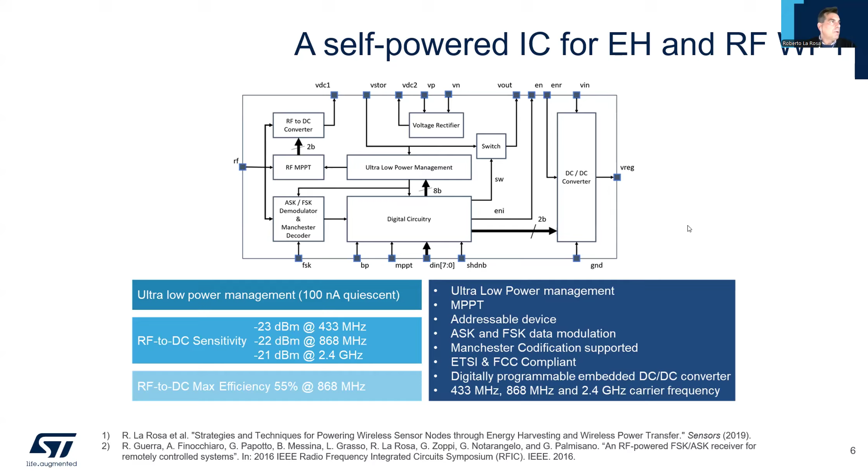Doctor, are you on slide number 6? I think you may be moving the slides, but we couldn't follow you. Are you talking about the same slide, number 6, or are you moving your presentation? Because we're still stuck on the same slide. It's number 6, I'm sorry. I'm sorry about that. I was talking about this. Okay, please, I'm sorry. I was talking about this. Now I was discussing this circuitry here. Okay, it's fine, yes, it was not updating. Okay. I'm terribly sorry about that.

So good to know. Basically the idea was, as I told you, at time zero: this is the state-of-the-art solution where you have the battery always charging the wireless sensor node, and you have a steady standby current, which is basically like paying somebody who is doing nothing. We are giving current to a wireless sensor node that is sleeping, not doing anything. So what we want to do is put a switch in between, so that the system is normally off. The switch is open, and we don't have any current going from the battery into the wireless sensor node.

So when we need the node to work, we can send the radio frequency power. This power will be received by a receiver that converts RF to DC, and closes the switch. Only at that point do we have current going to the wireless sensor node. So there's no longer a standby state, it's either on or off. And when I need to turn it on, even with a remote control, I can send it.

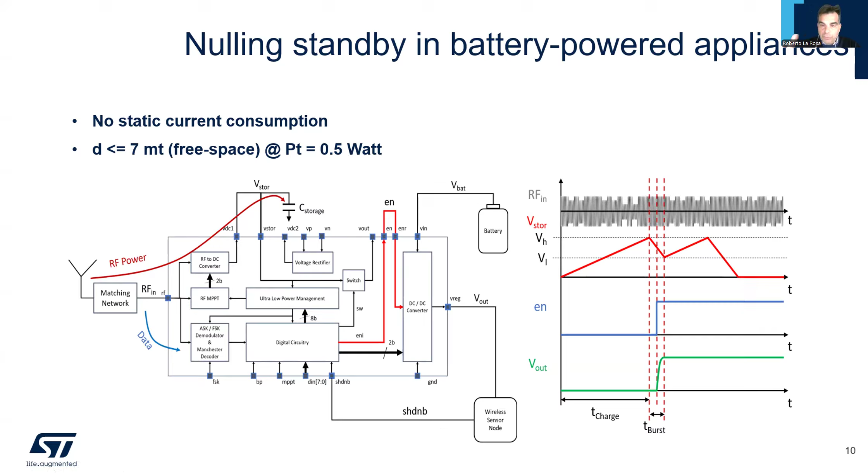That's the main difference. The idea is that nulling standby power consumption basically doubles the battery life of the wireless sensor node. But sooner or later the battery will need to be replaced. Instead of replacing the battery every 3 years, now I can replace it every 6 years. It's a big gain, but after 6 years I still need to go there and replace the battery.

What we do here is use a power transmitter, basically just a transmitter as big as this device. Here I have my wireless sensor node that I don't want to climb a staircase to reach and recharge. So what we can do is leave this power transmitter sending power, even for 1 or 2 days, whatever it needs, to recharge the battery.

As you can see, it's the same circuitry, but this time it's storing the energy and diverting it into the battery. So if I stay there, I will charge the battery. This is important because from the energy point of view it's a disaster—we send half a watt and receive only 5 microwatts here, needing to recharge a battery over a long time.

But I don't need to send anybody, especially with a staircase, to replace the battery or change anything. This could be handled by a cleaner or whoever is servicing the room. So it's very convenient from the maintenance point of view—a very convenient solution based on wireless battery charging or wireless power transfer.

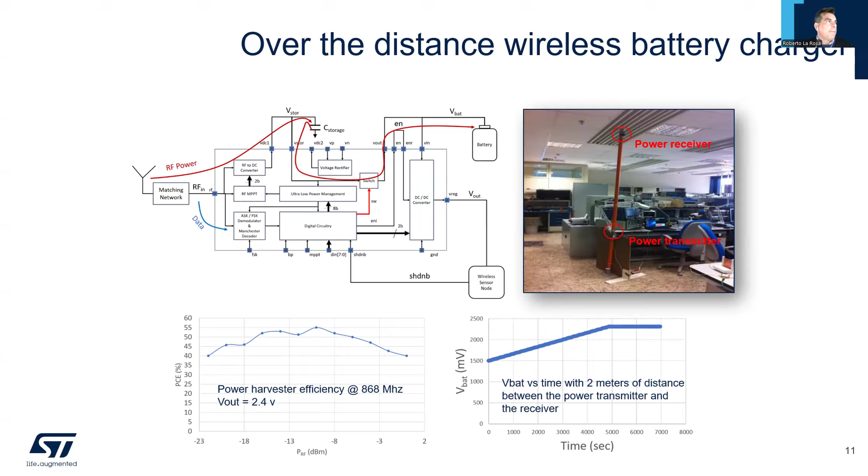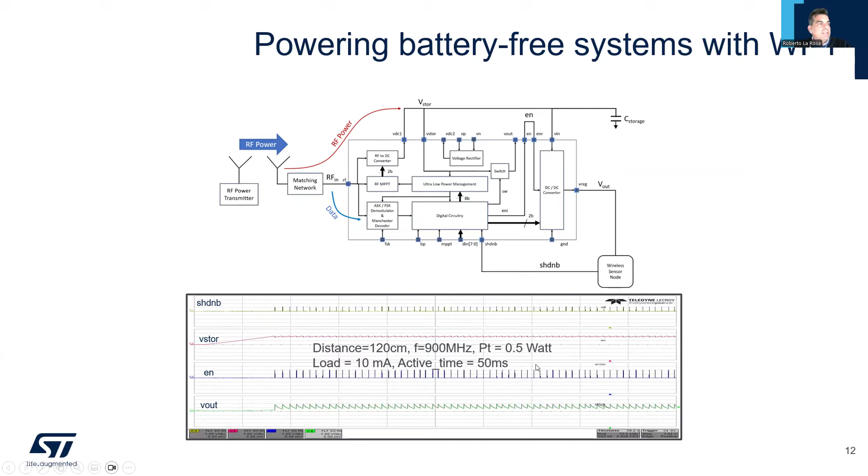We have seen that with a distance of 1.2 meters between the RF transmitter and the node, with a power transmitter of half a watt and a load of 10 milliamperes—which is quite a big load—for an active time of 50 milliseconds, the system works very well. So we can do that.

Now I'll show you a very practical example of this solution. We implemented this circuitry into a temperature sensor to put in an oven. The motivation is that modern ovens can work very well.

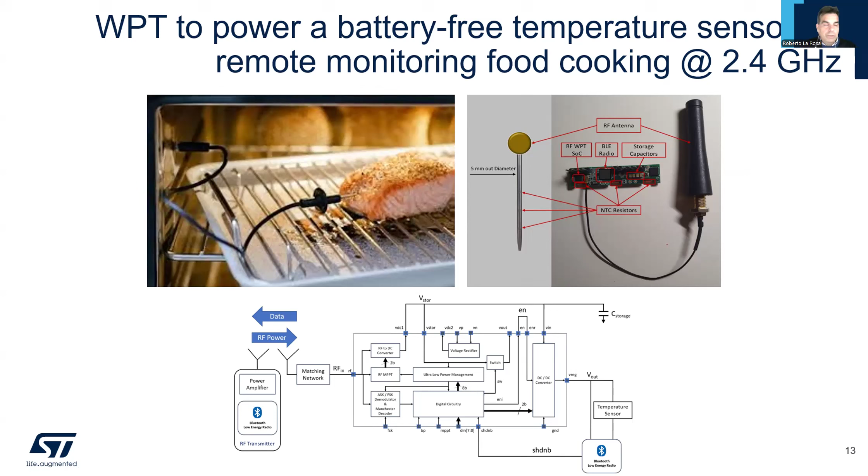Now another application where we have used the same concept is tracking luggage in a conveyor belt. The idea here is that today, when you travel and get an airplane and you have luggage, your luggage is tracked through the barcode.

Everybody knows the barcode on the luggage, which is a very good technology. It's well known and established there for years. But the disadvantage of this technology is that when the luggage gets lost, I need to send somebody with a scanner to scan any luggage one by one until I find the right one.

With this technology instead, that has been sponsored or required by one of the major players in airport management, we put sensors, we put trackers that are battery free on the luggage. So the luggage itself is already tagged with the same

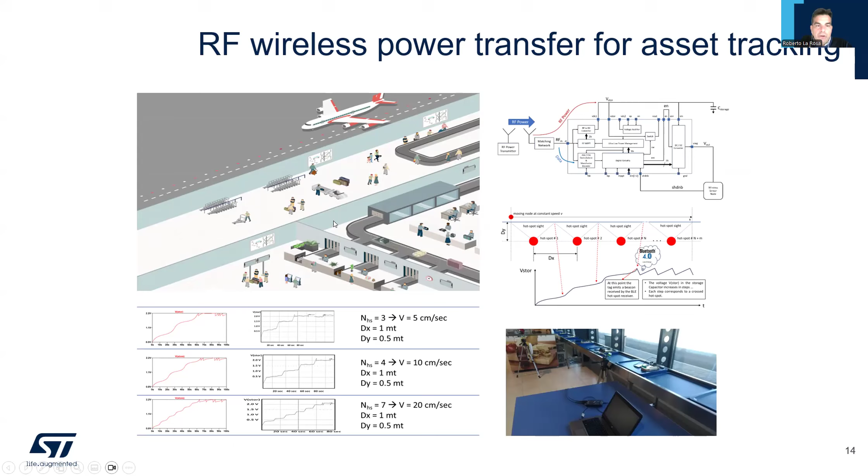Now, we go to the energy harvesting. Yes, like we're over 30 minutes, so maybe if you can conclude, because we have another presentation online. Okay, I just finished my presentation.

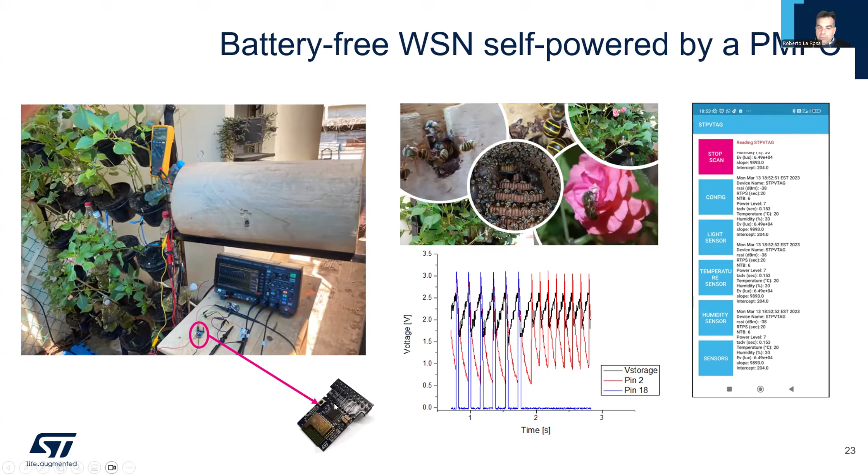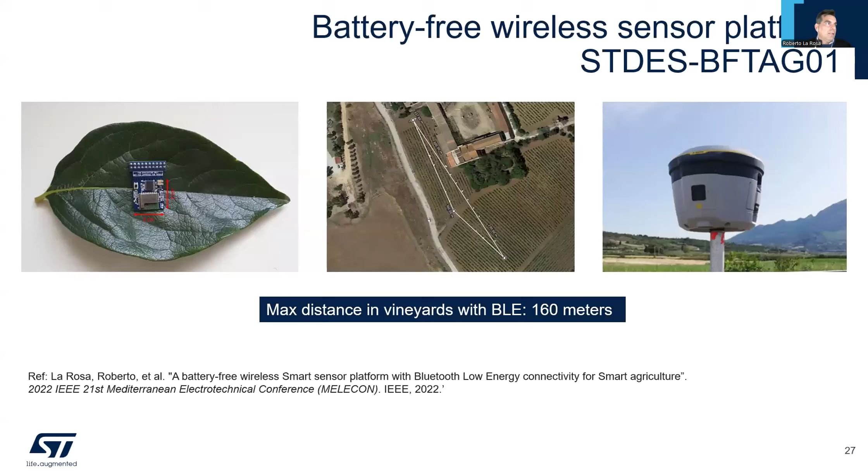But the message here is ready and is industrially proven, so it's no longer research. Having battery-free sensors and getting rid of batteries is no longer a dream. It's something real that can be an entrepreneurial activity. Thank you very much for your attention, and sorry if I had a delay in displaying the slides.

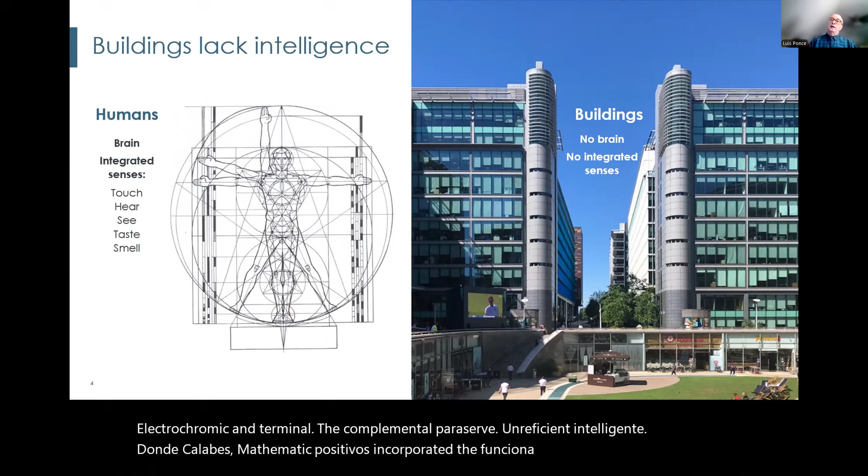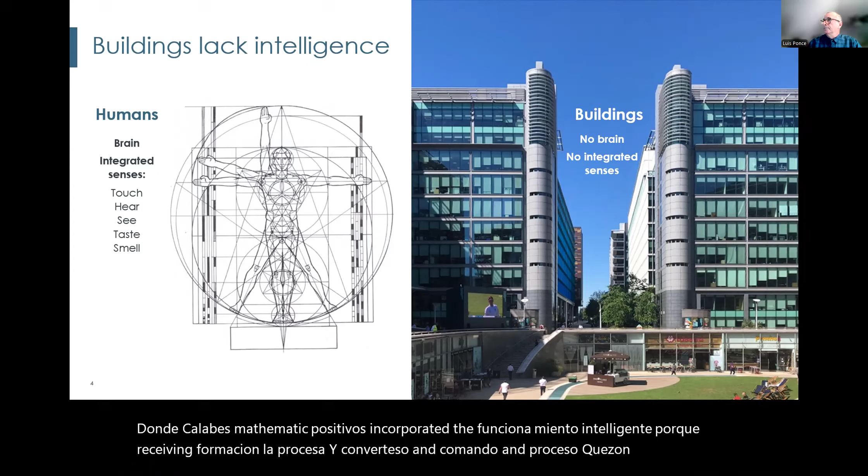Bueno, vamos a comenzar pensando en lo que es el vidrio electrocrómico en términos de un complemento para hacer un edificio inteligente. Vivimos una época de inteligencia, donde cada vez más dispositivos se incorporan a un estilo de funcionamiento que denominamos inteligente porque recibe información, la procesa y convierte eso en comandos, en órdenes, en procesos dirigidos de una manera determinada. En el caso de los edificios, de las viviendas, es algo que se había quedado un poco atrás porque no había sido completa la forma en que esa inteligencia se iba introduciendo en su funcionamiento. Inteligencia que básicamente consiste en dotarlo de sensores y de optimizar su funcionamiento.

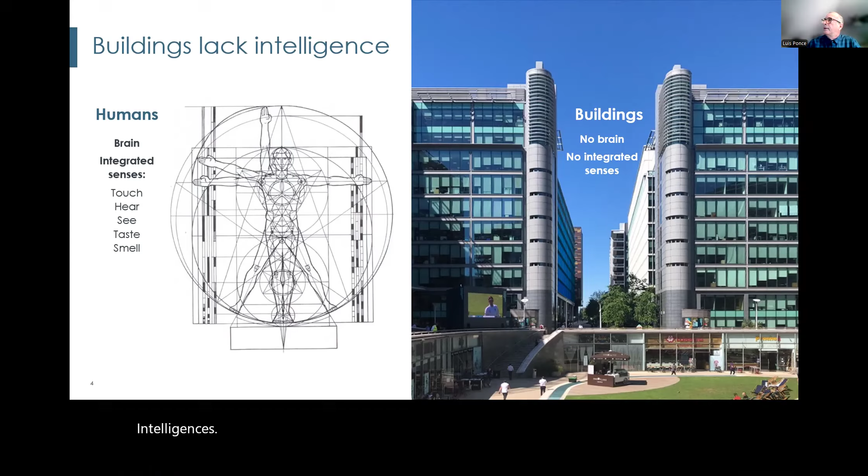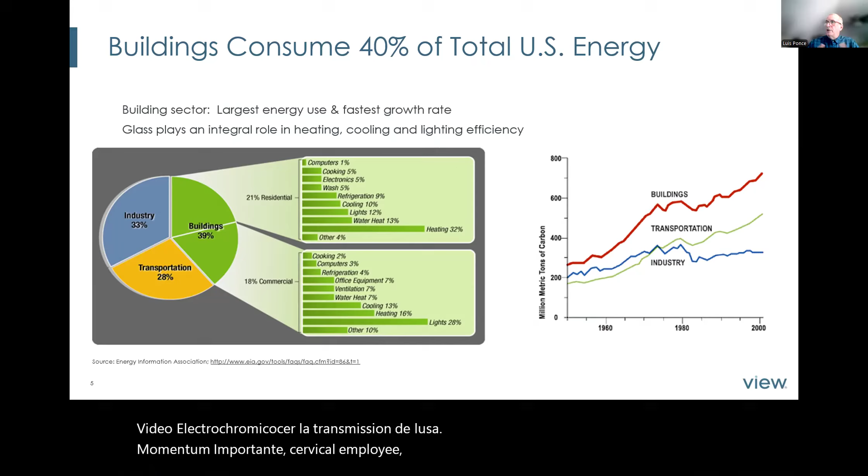El foco del vidrio electrocrómico va a ser la transmisión de luz al interior del edificio. Ese es un momento muy importante, por ejemplo en Estados Unidos el consumo de los edificios en términos de consumo eléctrico es muy fuerte, prácticamente el mayor consumidor que existe de electricidad, por encima del transporte, de la industria incluso. ¿Pero qué es lo que hace el vidrio electrocrómico?

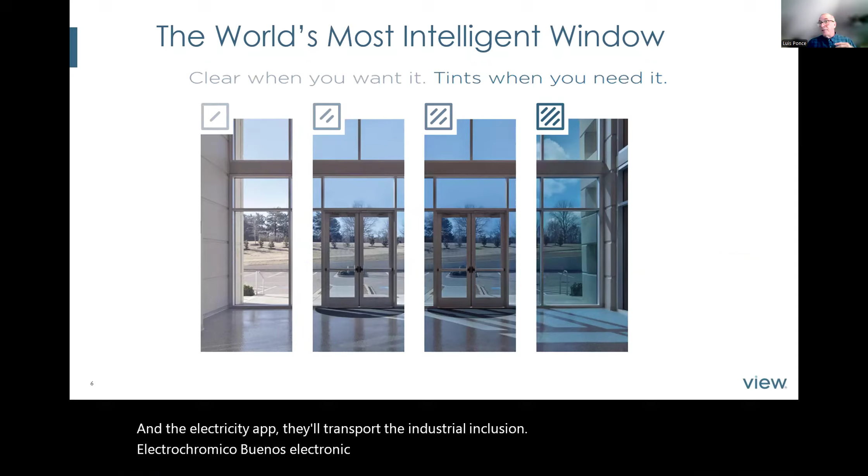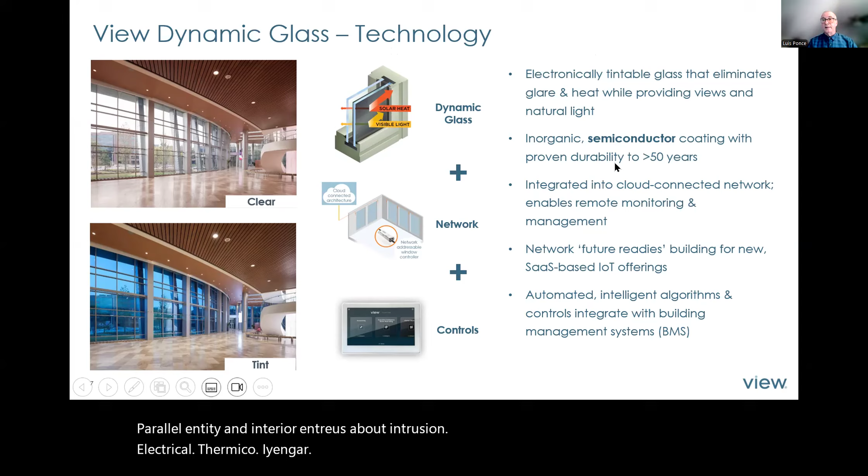Aquí en el centro ustedes pueden ver cómo se hace este dispositivo. Básicamente es una estructura, un device, donde tenemos dos vidrios colocados en paralelo entre sí. En el interior, entre ellos, se va a introducir un gas inerte para favorecer el aislamiento térmico. Y en la pared interna de uno de estos vidrios se va a depositar una capa, o más bien una multicapa, de un material semiconductor, que es la que va a permitir que ese dispositivo funcione. Eso se va a conectar a una red, a un network, y a un sistema de control que va a recibir información de sensores y va a determinar cuál va a ser la transmisión de esa ventana.

Perdón, ¿se me escucha bien? ¿Todo está bien?

Bueno, aquí hay un ejemplo de un edificio de un cliente al cual se le entregaron estas ventanas, y pueden ver dos situaciones a distintas horas del día, cómo va cambiando esa transmisión de luz para optimizarla.

Ahora los voy a invitar a ver brevemente un video de minuto y medio. Van a escuchar al director de nuestra compañía contar un poco cómo funciona esta tecnología, e incluso vamos a hacer una pequeña visita a la fábrica para que se hagan una idea de la tecnología que hay detrás de esto. Van a ver también un par de aplicaciones muy interesantes; no voy a hablar de todas ellas, pero les va a dar una idea de la gama de posibilidades que ofrece esta tecnología. Entonces, vamos a escuchar.

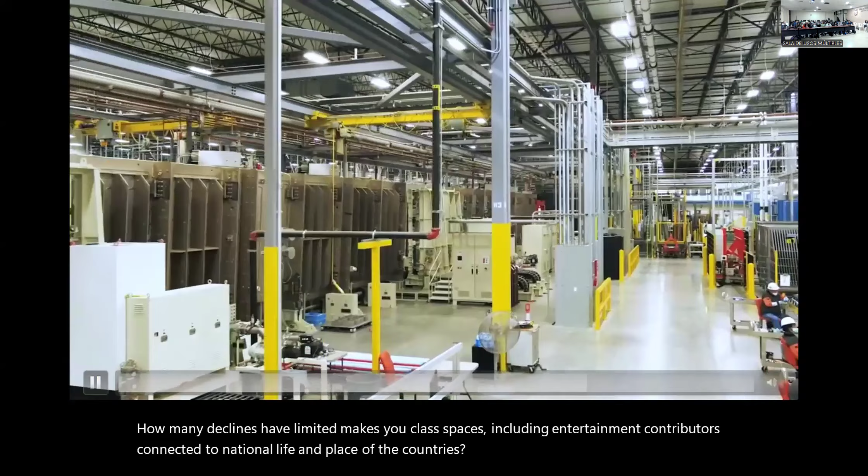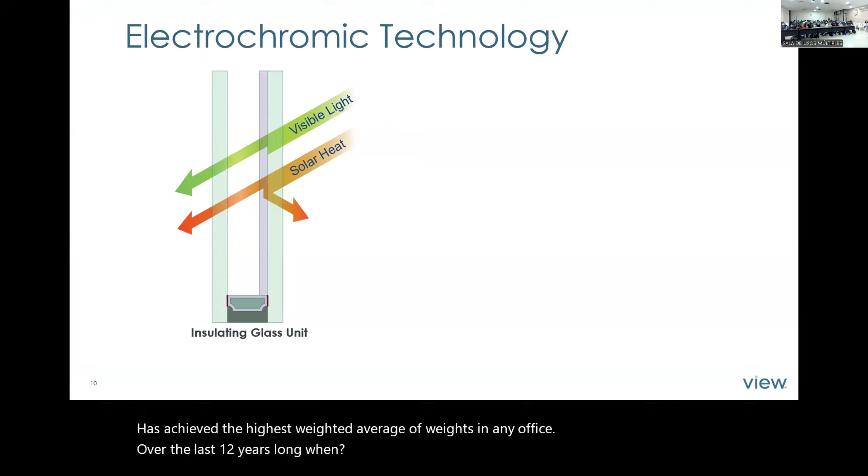Pero no se escucha, doctor. No se escucha el audio. Acá tiene el volumen, pero allá no sé si es algo. Ah, es que no le dio volumen. Es que ahí tiene el volumen. Doctor Luis. Ya va a acabar. Perdón. Bueno, sí se pudo ver. Se pudo, pero no podemos escuchar nada. Qué pena, en fin, lo más importante era la imagen, ¿no?

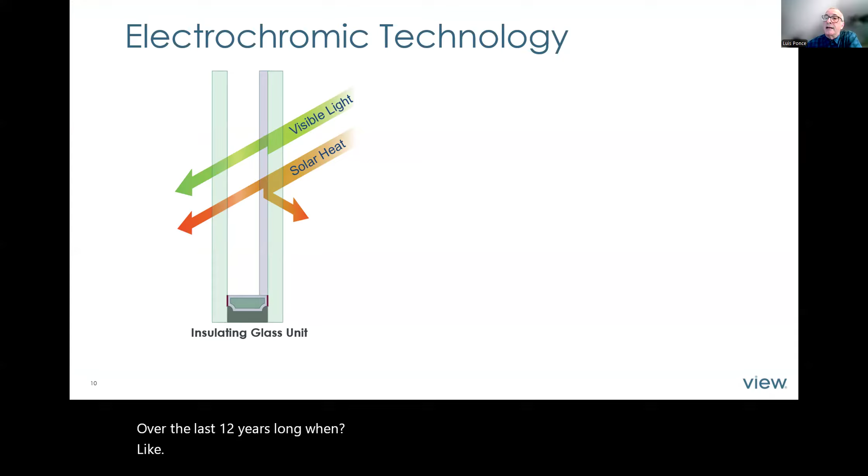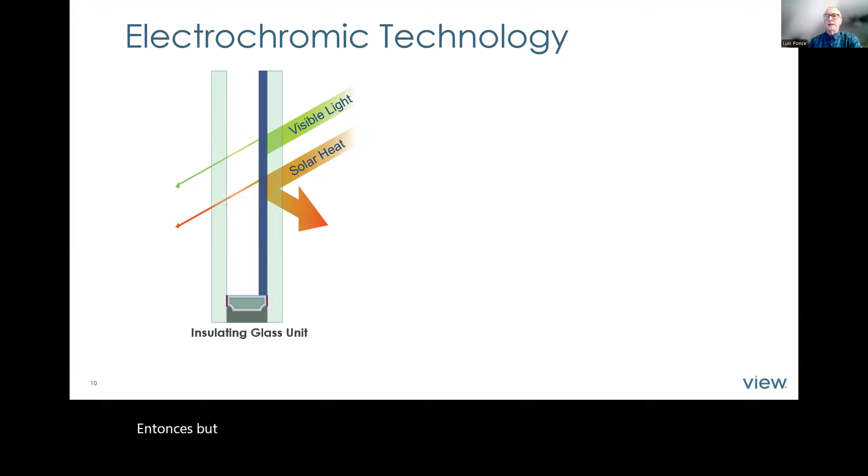Aquí vemos nuevamente un croquis que ilustra cómo está estructurado el dispositivo. Básicamente en esta capa que está en el interior de una de las paredes está la multicapa: vamos a tener un grupo de films que forman la estructura del dispositivo. Ahora vamos a ver cómo eso funciona. Básicamente, una vez que se polariza, ocurre una transferencia de cargas y esta conduce a la variación de las propiedades ópticas de esa película.

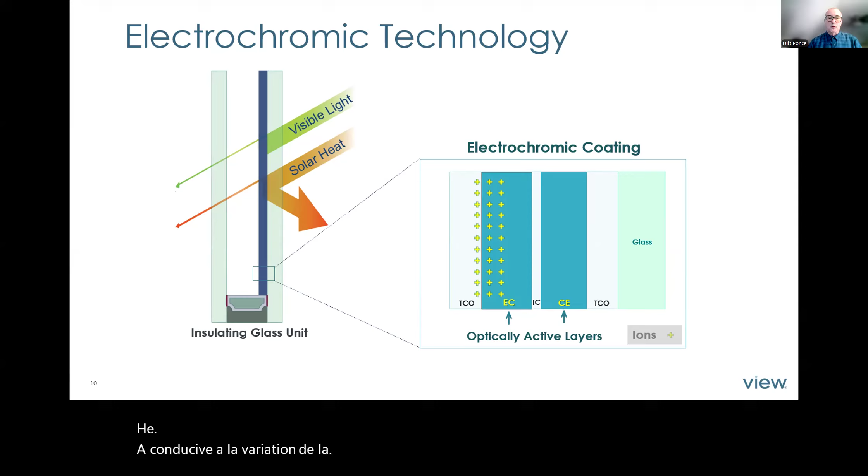Aquí lo podemos ver en un corte transversal. Ese film está formado por un total de 12 capas, aquí no se pueden distinguir todas, con un espesor total de 1.6 micras. Esto que ven aquí abajo es el vidrio, que sería el sustrato. Luego se deposita un conductor transparente, que va a ser uno de los electrodos. A continuación hay dos capas, EC y CE, que son capas semiconductoras, y arriba, al final de todo, otro conductor transparente. Estos, al ser polarizados, generan o inducen el movimiento de cargas que va a transformar las propiedades ópticas del dispositivo.

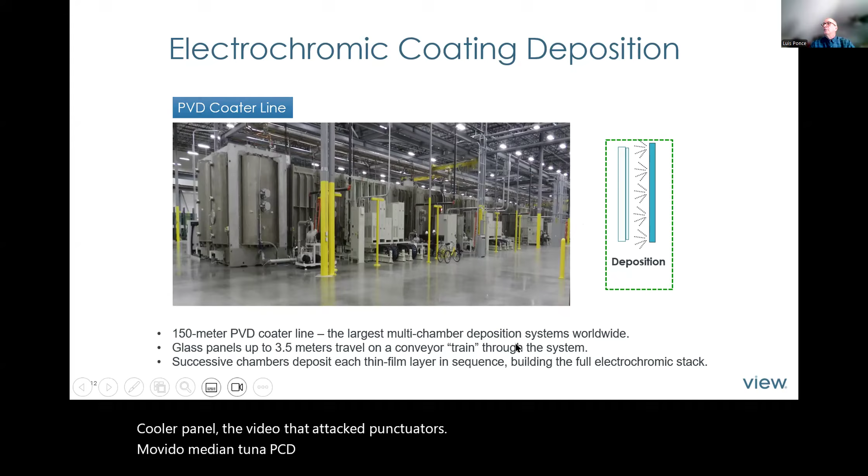Esto que ven aquí es el sistema de ultraalto vacío donde se depositan esas películas. La empresa presume de contar con la línea de ultraalto vacío, según ellos, más larga del mundo. Tiene 150 metros de largo, es una estructura gigantesca, porque por ahí dentro van a circular paneles de vidrio de hasta 3.5 metros, movidos mediante una especie de tren o vagones que circulan por ahí adentro, haciéndolos pasar por las diferentes cámaras.

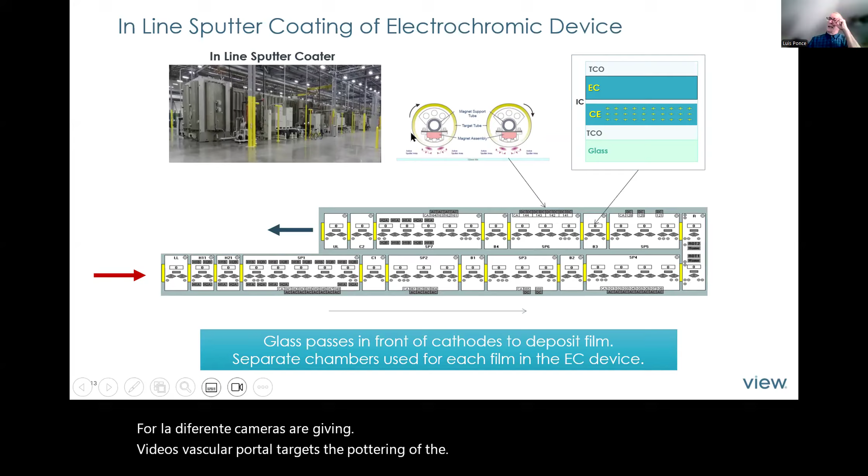Aquí ven, por ejemplo, con la flecha roja se indica la entrada de los vidrios, y va a circular por todo este camino, este recorrido, hasta salir, pasando por los targets de sputtering o del sistema de depósito, que va formando las diversas capas, paso a paso, una tras otra, hasta que sale ya completado. Esa es, digamos, la tecnología más importante que tiene la fábrica, la fundamental, el corazón de ella, pero requiere acompañarse también de otra tecnología muy importante, que es la tecnología láser, que es la que facilita el funcionamiento del dispositivo, como vamos a ver.

Les quiero comentar de pasada que desde que empecé a trabajar en la fábrica me tuve que ver envuelto en un grupo de investigaciones y proyectos, algo muy gratificante, porque uno se hace la idea de que en este tipo de instalaciones todo está ya súper establecido, y pues no, resultó que hay un montón de tarea por hacer. Hay 6 proyectos en los que me he visto envuelto en estos años; les voy a hablar del último de ellos solamente. Pero sí, hay un montón de trabajo para un investigador ahí.

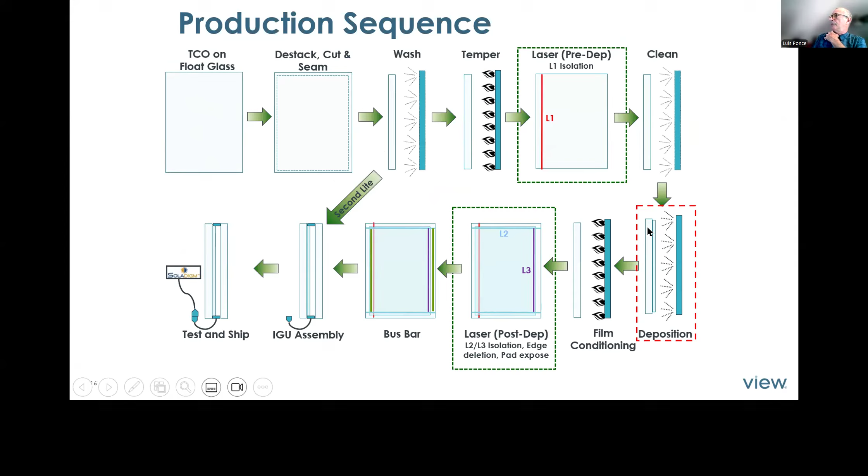Bueno, esto es lo que sucede en el flujo productivo de la fábrica. Llegan los vidrios, se hacen distintos procesos, no voy a entrar en detalle, hasta llegar a este que vemos aquí dentro de estas cajas de líneas punteadas en rojo, que es el proceso de depósito. Y más adelante viene un proceso láser, que ven aquí. Les voy a hablar de él ahora.

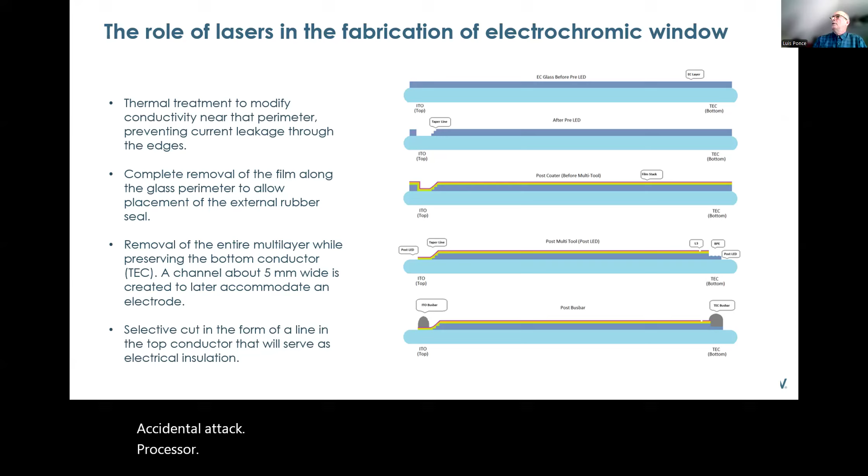Aquí lo vemos, vamos a hacer cortes transversales paso a paso del vidrio. Llega el vidrio con su conductor transparente, y ya hay un primer proceso láser que es de remoción. Como ven, aquí queda interrumpido lo que era una de las capas.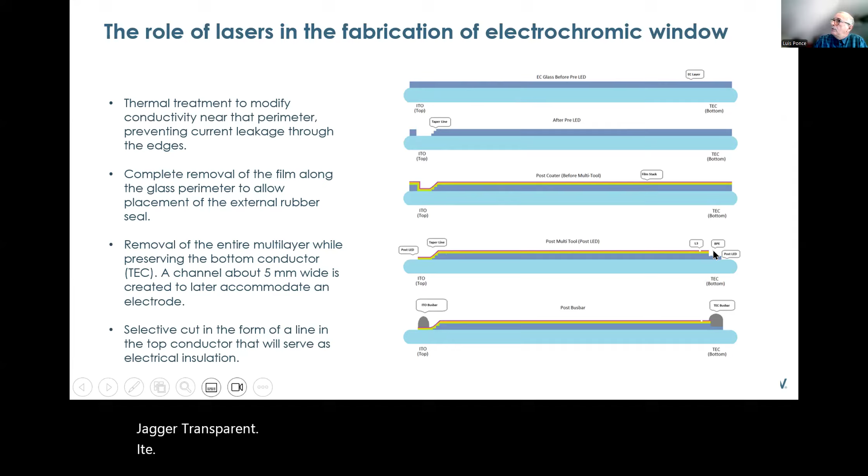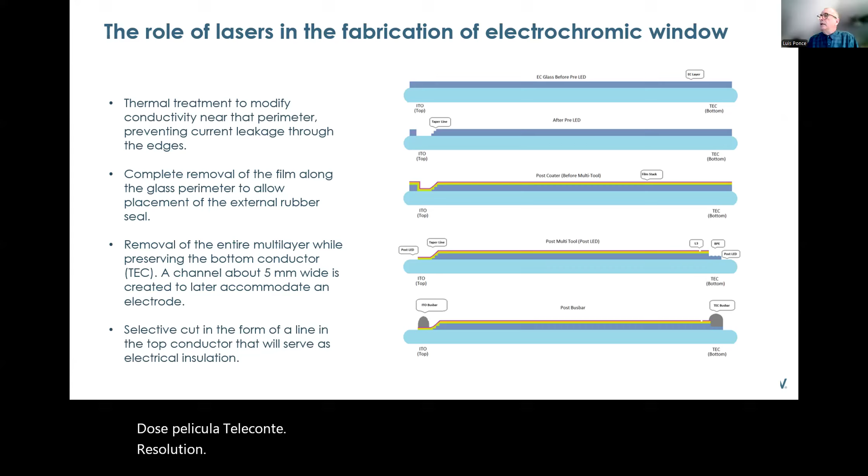Luego se hace el proceso de depósito y hay que hacer otros procesos láser, que se ven aquí donde estoy señalando, a la derecha abajo. Son procesos muy refinados, a veces tienes que con el láser hacer un canal que retire solo una de las 12 películas que les conté. Estamos hablando de resolución submicrométrica en profundidad y en ancho, pues puede ser de canales de decenas de micras hasta algunos milímetros. Muy preciso, es retador.

Son procesos complicados. Este proceso en particular, al que vamos a referirnos más que otros, es un proceso que permite remover una parte de la capa pero preservando el conductor transparente que está hasta abajo, inmediatamente sobre el vidrio. Y miren lo que pasa.

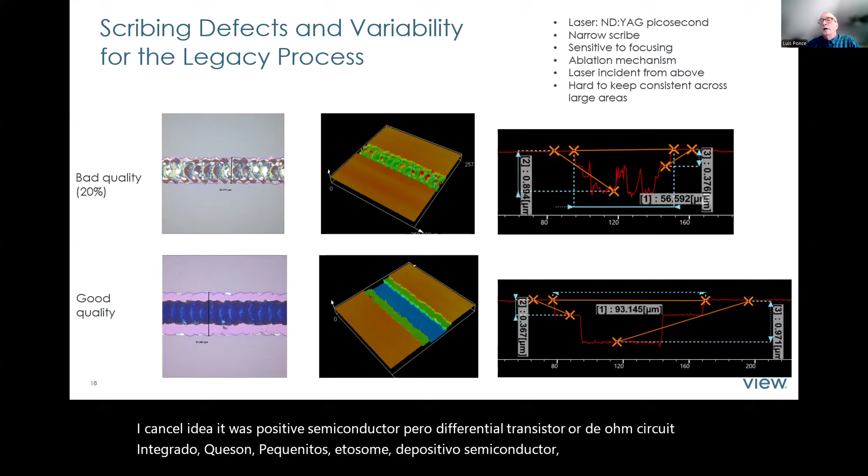Háganse la idea, esto es un dispositivo semiconductor, pero a diferencia de un transistor o de un circuito integrado que son pequeñitos, estos son dispositivos semiconductores gigantescos. Estamos hablando de vidrios de 3 y 4 metros. Entonces eso es un reto en términos de que toda esa capa esté perfectamente uniforme.

Básicamente es casi imposible de lograr. Siempre hay inhomogeneidades, sobre todo en zonas cercanas a los bordes, en diversas áreas. Y eso hace el proceso láser todavía más complicado.

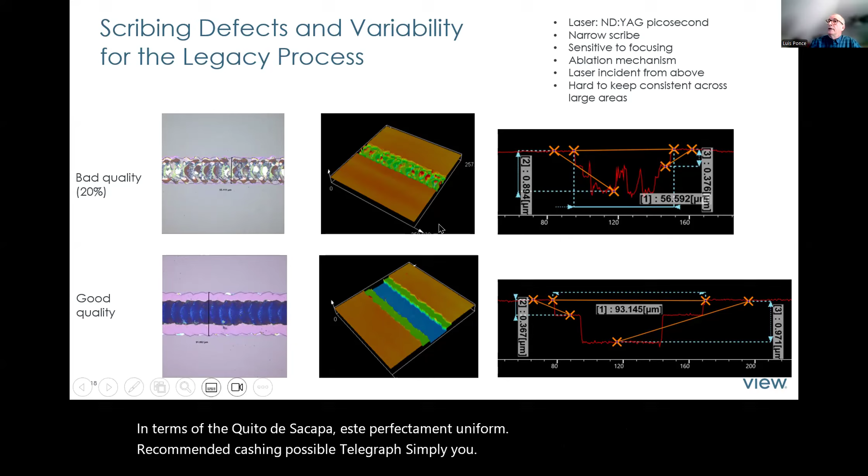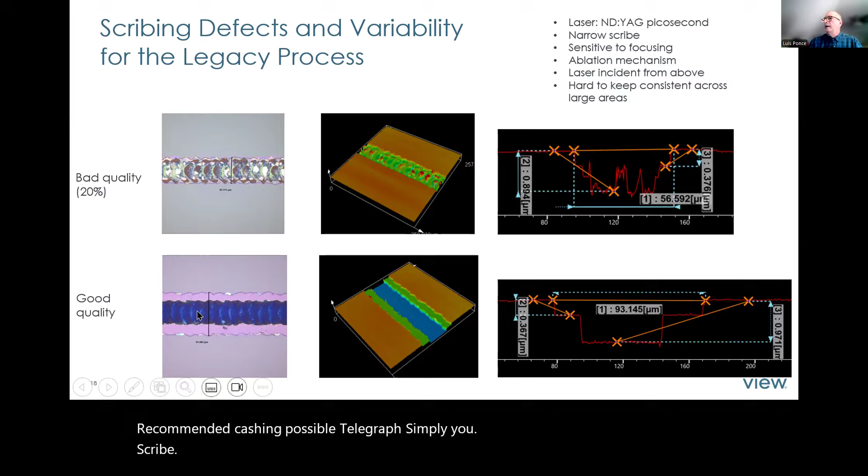Vean aquí dos situaciones. La de abajo es lo que llamamos scribe, es el acto de hacer con el láser un canal. Este quedó muy bien. Vean qué geometría tan limpia, sobre todo en esta figura, es un canal perfectamente abierto. Aquí están las dimensiones: tenemos una profundidad de 0.97 micras, casi una micra, y un ancho de 93 micras.

Pero vean lo que pasa aquí. Debido a variaciones en las propiedades ópticas del material, el láser no trabajó bien, no logró remover limpiamente el material del canal, quedan irregularidades. Todas esas cosas van a afectar el funcionamiento del dispositivo a la larga.

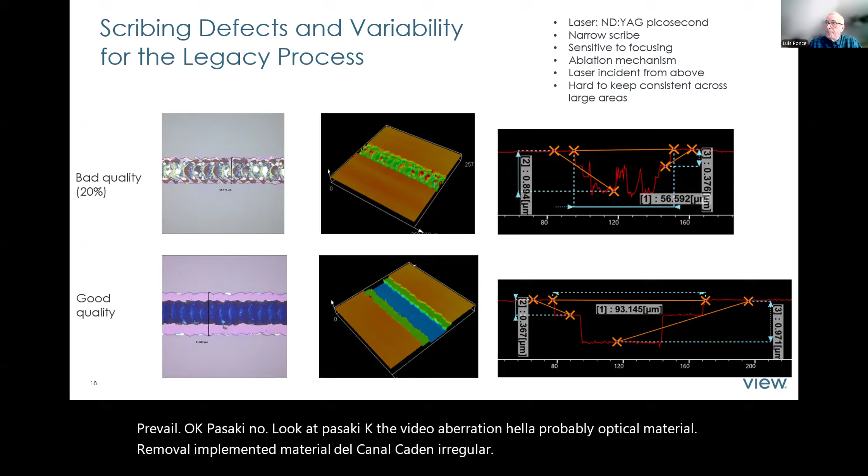Necesitamos un proceso que sea limpio, que sea robusto, que siempre garantice una calidad de esos canales extrema. Y eso es lo que le llamaríamos un proceso selectivo, que retire una parte del material y deje el resto.

Esto llevó, por supuesto, un montón de trabajo, primero tratando de optimizar el proceso que había, que siempre tuvo esa solución, tuvo sus límites, nunca se logró resolver del todo por problemas de principio. Pero para que se hagan una idea, este proceso conducía a pérdidas del orden del 10%, llegaron a ser hace unos 3 años más o menos. Estamos hablando de unos 20 millones de dólares tirados por un proceso específico.

Esto fue así porque se importó un proceso que es el que ahora todavía se usa en la industria de semiconductores, en celdas solares, que allí funciona bien porque son dispositivos de pequeñas dimensiones y el material es extremadamente homogéneo. Pero en nuestra situación eso no existe, es una realidad mucho más compleja.

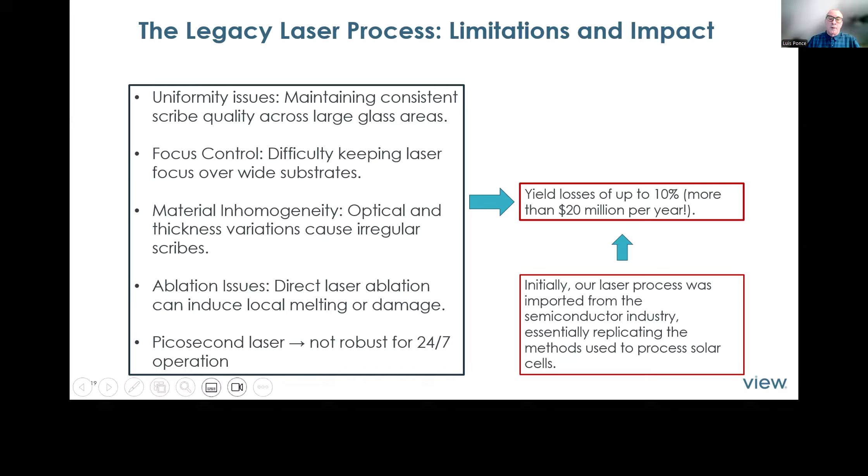Entonces, ¿qué hicimos? Bueno, pues aquí nos fuimos a un paradigma diferente, decidimos eliminar por completo el tipo de proceso que teníamos implementado y que usa la industria, para irnos a otra cosa, le llamamos spallation. Es una palabra un poco difícil de traducir al español, pero háganse la idea de que es como pelar, miren cómo se pela una cebolla. Que tú puedas retirar una película de manera casi mecánica, y que quede perfectamente limpio y sin daño lo que está debajo.

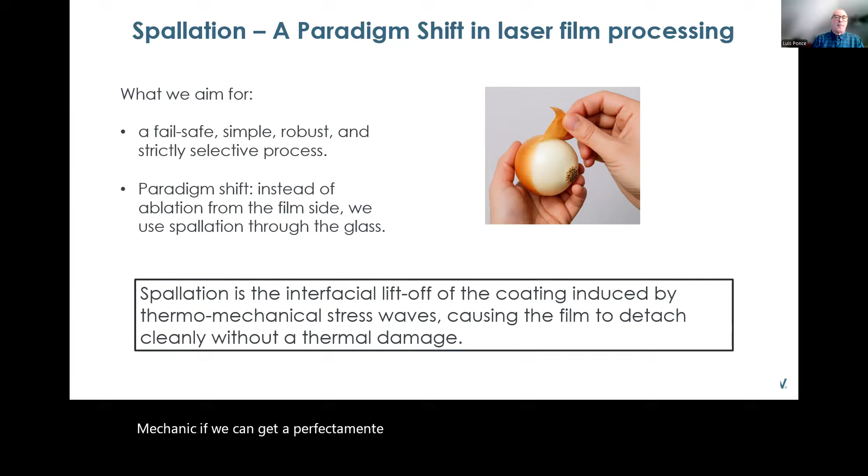Para eso descubrimos una nueva forma de hacer las cosas.

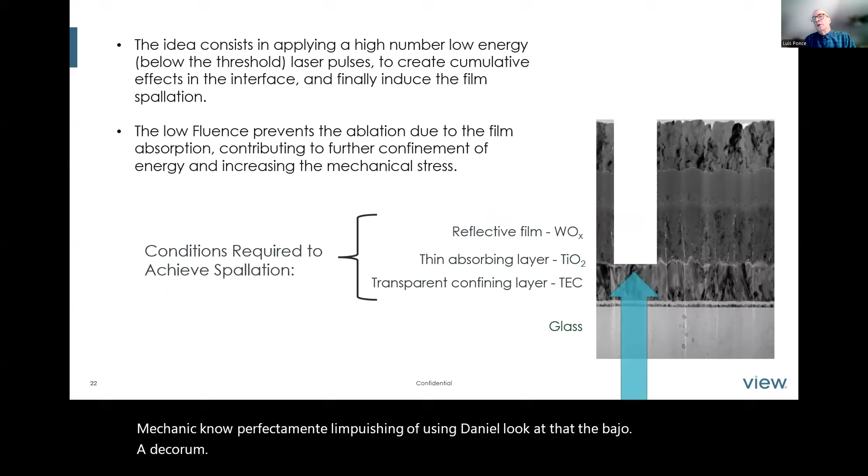Normalmente en los procesos láser llamamos o hablamos del umbral de ablación. Es la energía que tú tienes que darle a la capa para poder extraerla, para poder vaporizar el material. Eso es ablación. Entonces siempre tienes un umbral: por debajo de esa energía no haces nada, por arriba sí extraes, cortas, taladras o evaporas el material.

Entonces lo que nosotros descubrimos es que entrando con el láser desde la parte trasera del vidrio, a través de la capa, eso se podía hacer. Había una variante de esto ya conocida, que es por encima del umbral. Por encima del umbral tirabas a través de un material transparente y ¡pum! Lograbas retirar el material deseado.

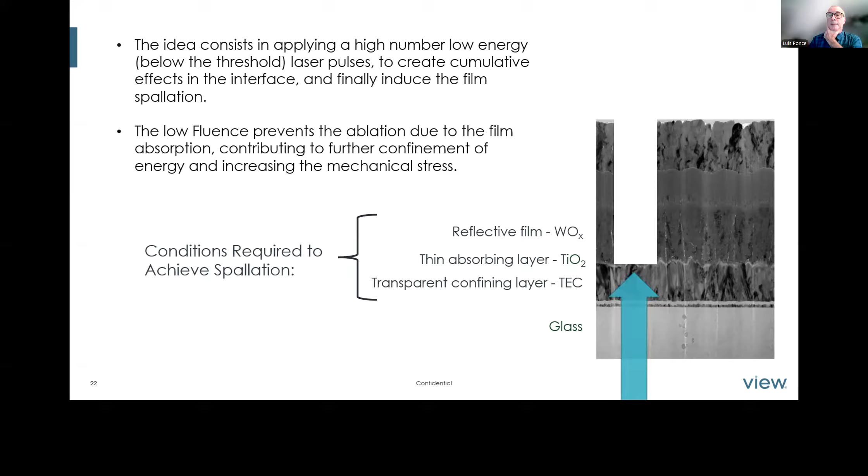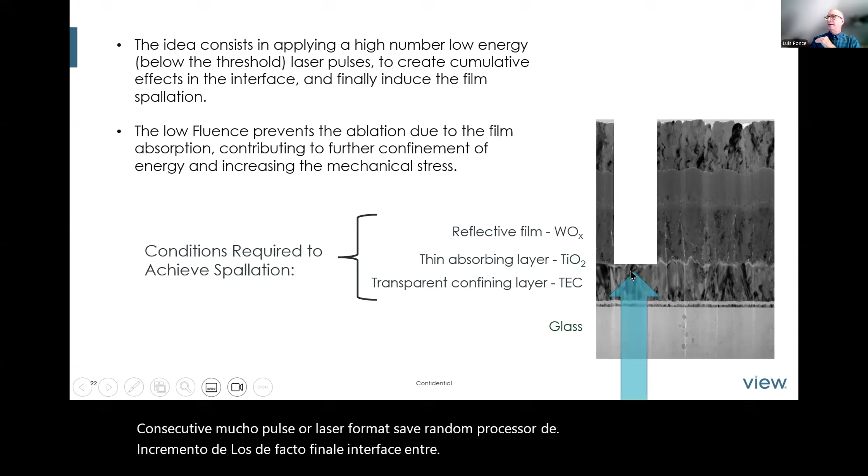Pero aquí lo que hicimos fue otra cosa, fuimos a valores de energía que están por debajo del umbral. Y resulta que con una repetición consecutiva de muchos pulsos láser aplicados de esa forma, se iba generando un proceso de incremento de los defectos. Al final, la interfaz entre dos materiales diferentes es un defecto. Entonces la luz del láser se absorbe ahí, y va incrementando la absorción y aumentando las tensiones entre esas dos capas para, mediante esa fuerza termomecánica, lograr la remoción del material.

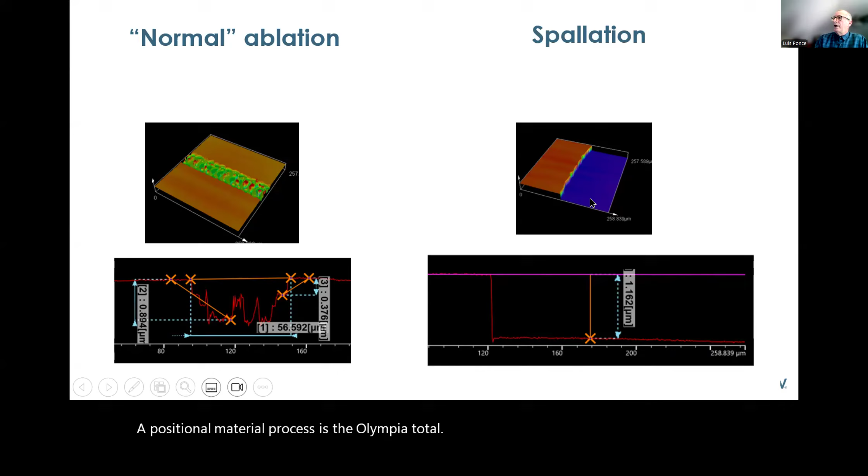Bueno, y aquí les puedo mostrar el resultado ya. Vean a la derecha cómo queda la expulsión del material después de este proceso. Es de una limpieza total, no hay nada de residuos, el canal que se logra es básicamente perfecto.

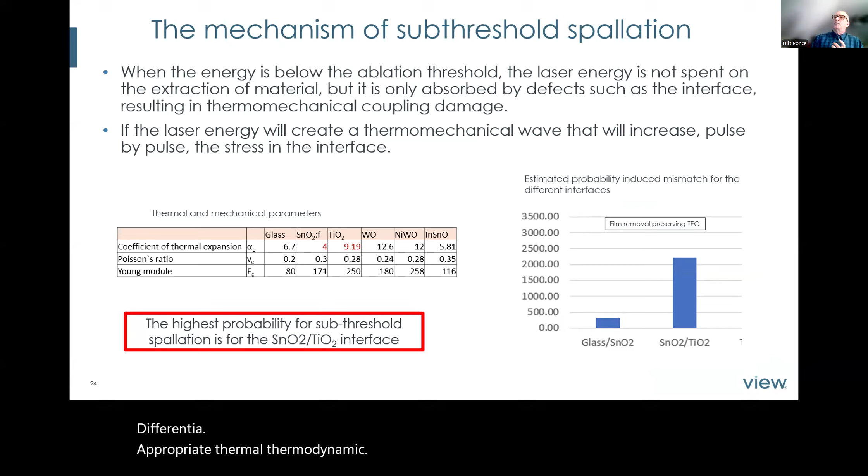No voy a entrar mucho en la parte teórica, sé que los tiempos son cortos. Prestemos atención a dos o tres cosas: diferencias entre las capas en propiedades termodinámicas, cosas como el coeficiente de expansión térmica, el módulo de Poisson, el módulo de Young, son las propiedades mecánicas que son distintas entre ellas, y también las propiedades ópticas.

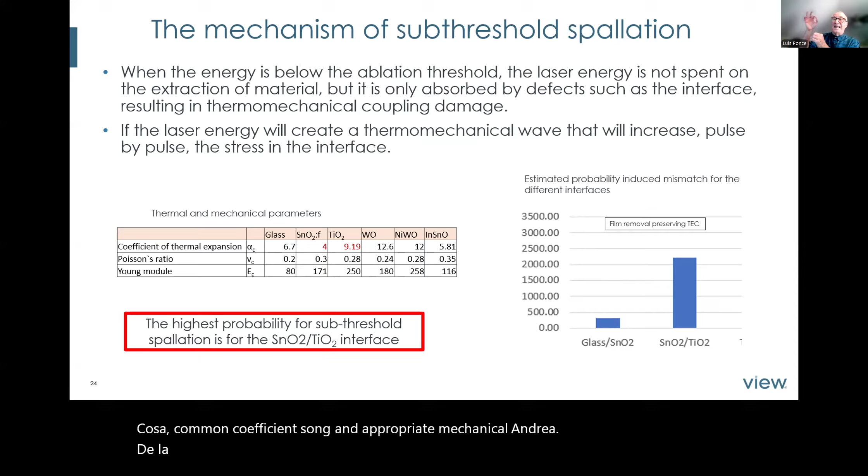Entonces puede existir una combinación que te garantice que una determinada interfase es la que va a funcionar para que se haga la expulsión de la película en esa suerte de pelado o laminación del material.

Y entonces logramos un resultado espléndido, poder hacer estos scribes, estos canales, con el mismo láser que teníamos en la industria y de una manera totalmente selectiva. Vamos a ver un segundo video, más corto que el anterior.

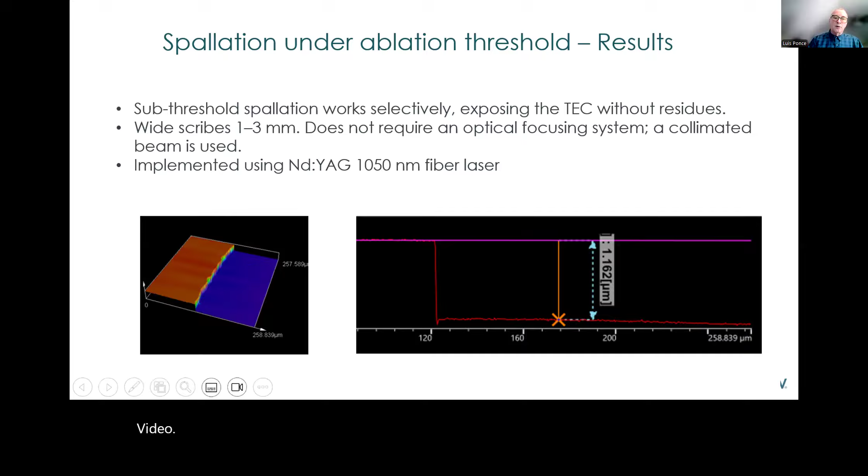En el anterior no importa el sonido, lo que importa es que van a ver el vidrio moviéndose y un láser que dispara desde abajo. Van a poder percibir cómo el material es extraído en forma casi de trozos, confirmando el mecanismo del que estamos hablando.

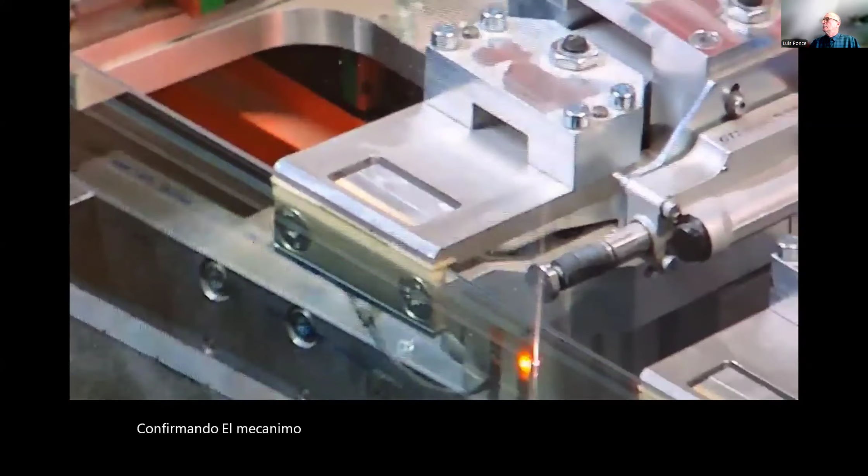¿Sí se pudo ver el video? Sí, sí. Perfecto, gracias.

En la gráfica se ilustra cómo las pérdidas se disminuyeron. Fuimos ajustando el proceso anterior, pero introducir este nuevo proceso nos llevó a una nueva realidad. Fue un ahorro de millones y estamos muy felices.

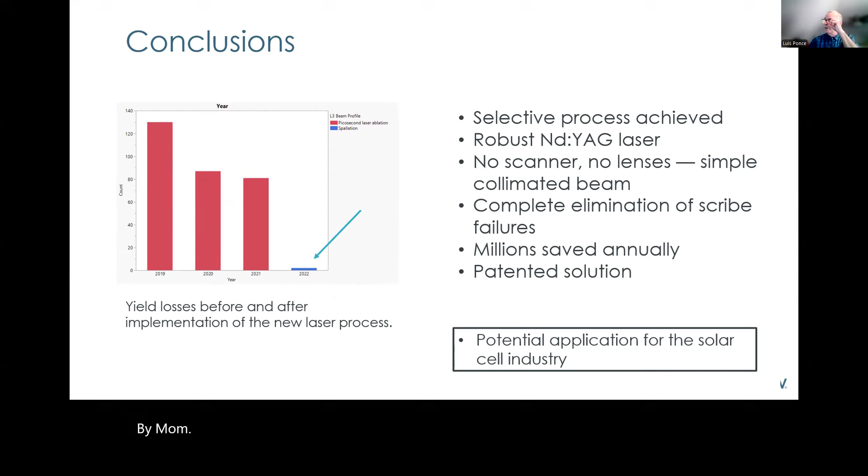Es ver un proyecto científico funcionando y resolviendo un problema real de una manera contundente. Tiene aplicaciones potenciales en otros procesos similares, como por ejemplo en celdas solares, etcétera.

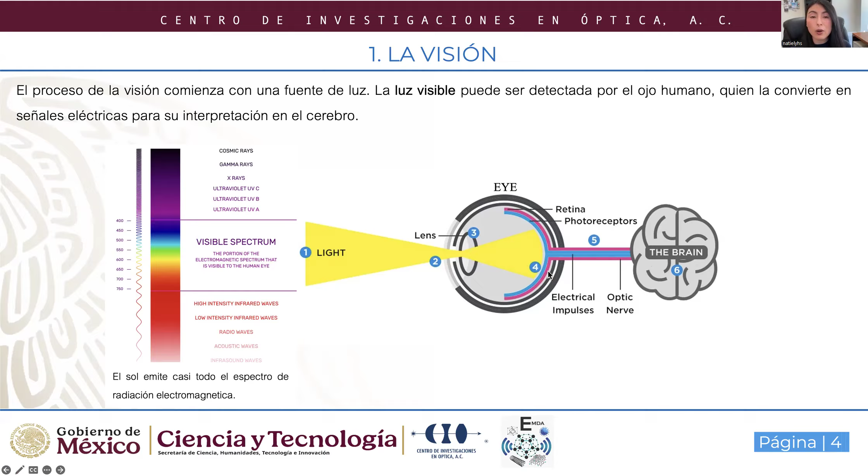Hablando específicamente del ojo, el iris y la pupila van a ser los que regulan la entrada de luz a nuestros ojos. Si hay mucha luz, nuestra pupila se hace más pequeña para que no entre tanta, y si hay poca luz, nuestra pupila se vuelve más grande para que entre un poco más de luz a nuestros ojos.

Una vez que la luz ya es regulada por nuestra pupila, pasa por el cristalino, que se conoce como nuestra lente natural, y nos ayuda a enfocar esa luz hacia la retina, que como habíamos mencionado anteriormente, va a ser la parte de nuestros ojos encargada de convertir la luz en señales eléctricas.

Haciendo la comparación con la cámara, el encargado de regular la entrada de luz a la cámara es el diafragma, quien proyecta la imagen no sobre una retina, sino sobre un sensor que nosotros conocemos como CCD, a través de la lente de la cámara. Y el CCD, que es una matriz de fotosensores, si se dan cuenta, es muy parecida a la retina.

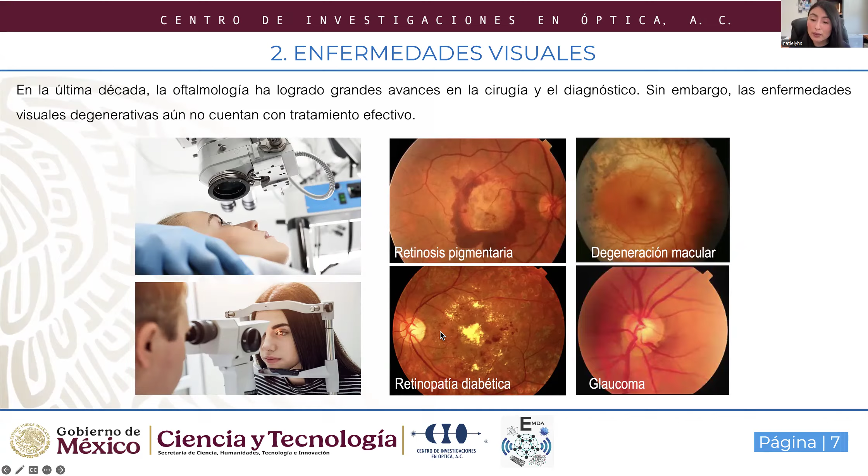¿Cuáles son las enfermedades degenerativas que tienen mayor prevalencia a nivel mundial? Tenemos la retinosis pigmentaria, la degeneración macular, la retinopatía diabética y el glaucoma. Vamos a hablar de manera muy rápida de cada una de ellas para entender qué es lo que pasa y cuáles son las repercusiones que tiene en un paciente.

De entrada, nosotros sabemos que estas enfermedades no tienen tratamiento efectivo. Sus tratamientos se basan únicamente en ralentizar la progresión de la enfermedad. La retinosis pigmentaria va a provocar la degeneración de los fotorreceptores, lo que va a llevar consecuentemente a la muerte de los mismos.

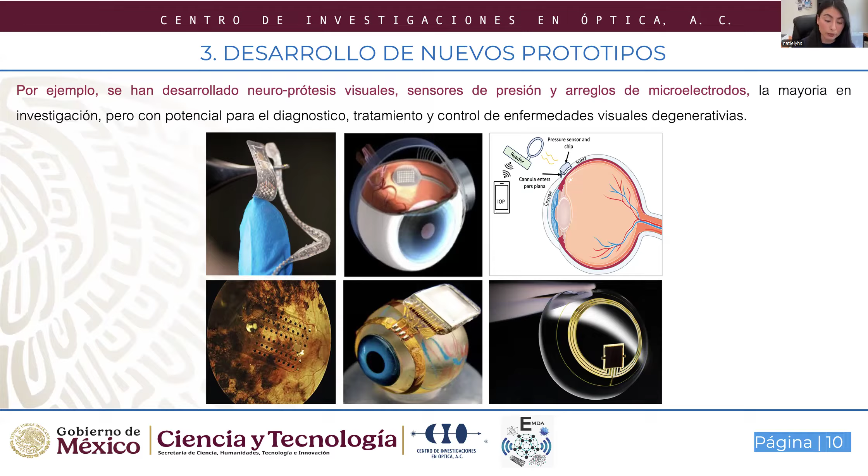Específicamente, nuestro grupo de investigación se encuentra trabajando en dos prototipos: un arreglo de microelectrodos para la estimulación eléctrica transcorneal y un sensor de presión inalámbrico.

Vamos a hablar de cada uno de estos prototipos para conocer qué nos llevó a desarrollarlos, en qué punto vamos en este momento y cuáles son los principales desafíos a superar.

Empecemos hablando del arreglo de microelectrodos para la estimulación eléctrica transcorneal o estimulación eléctrica de la córnea. El desarrollo de este prototipo tiene el objetivo de mejorar la percepción visual de pacientes con enfermedades visuales degenerativas, a partir de la activación y regeneración del tejido visual dañado.

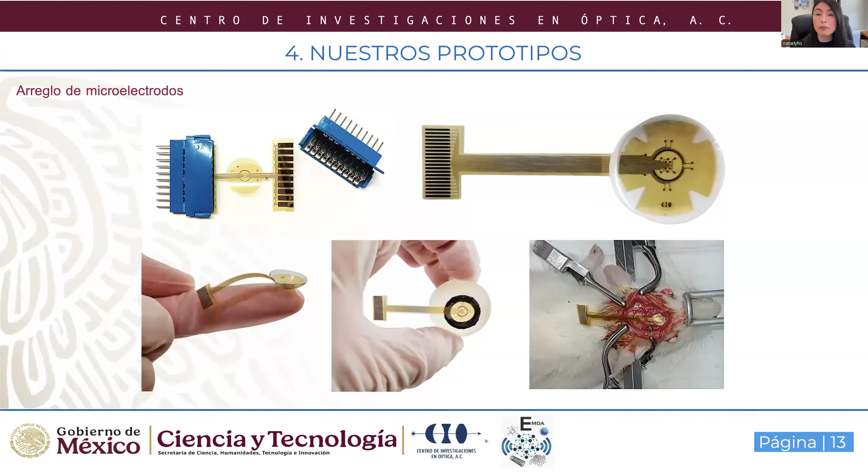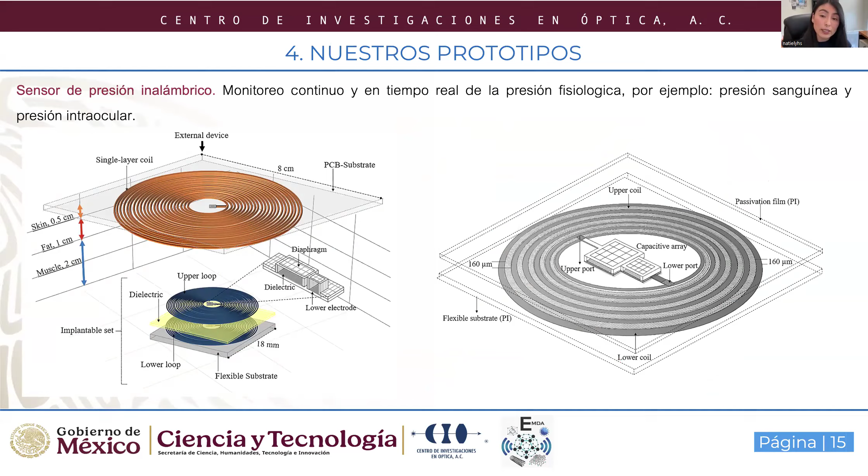Vamos a pasar rápidamente a su principio de funcionamiento, pues prácticamente este dispositivo consiste en dos circuitos RCL formados por una bobina, una resistencia y un capacitor. Si estamos familiarizados con este circuito que es bastante básico, si lo alimentamos con una corriente variable en el tiempo, generamos un campo magnético y vamos a inducir una corriente variable en el tiempo que va a alimentar a nuestro sensor, que es nuestro capacitor.

Para que un capacitor pueda utilizarse como sensor, lo diseñamos con una cavidad de aire, como la ven en esta imagen, para que al momento de aplicar presión, la placa superior se flexione y ese cambio en la distancia y posteriormente la posición del diafragma sobre el electrodo inferior aislado me cambia la capacitancia.